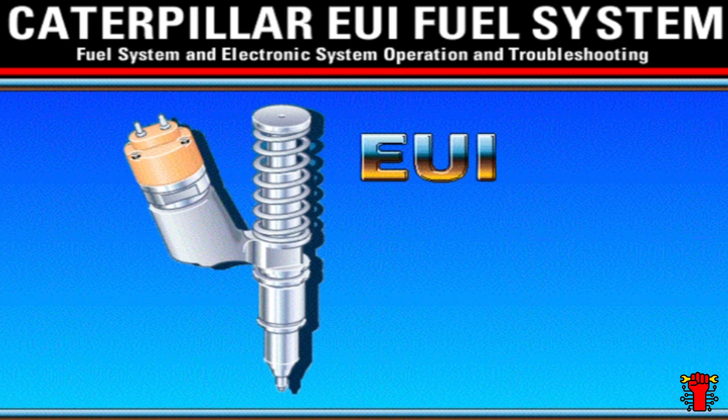Welcome to the introduction of basic operation and troubleshooting for the Caterpillar EUI Fuel System. This presentation is a generalized introduction of the features, system operation, and troubleshooting basics for Caterpillar engines using the mechanically actuated, electronically controlled unit injector fuel system.

This presentation is not intended to replace the Caterpillar service manual or other service publications. For detailed troubleshooting information, always refer to the latest service publications.

The EUI fuel system has been used on most new 10 to 16 liter displacement models of Caterpillar electronic truck and industrial engines introduced since 1988. This fuel system provides very high injection pressures and full authority electronic control for optimal engine performance, fuel economy, and exhaust emissions. Applications include the 3176, 3196, C10, C12, and 3406E engine families.

This presentation covers 4 topics: the electronic engine families using EUI, the operation of the EUI fuel system, the operation of the electronic control system, and finally, basic fuel system troubleshooting.

Since its introduction in 1988, the EUI fuel system has undergone many design changes to add features and improve performance and reliability. However, the operation and troubleshooting of all EUI systems is very similar. This presentation uses a generalized example of a system with the latest features.

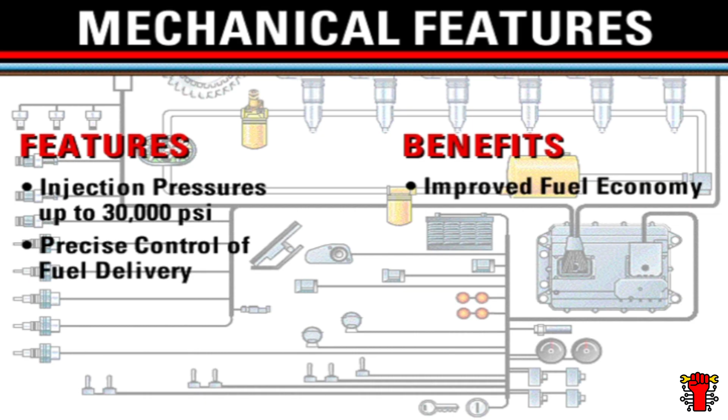The mechanical system consists of the low-pressure fuel supply system and EUI injectors. These components produce very high injection pressures of up to 30,000 psi and provide precise control of fuel delivery. This results in improved fuel economy and reduced exhaust emissions.

The electronic control system provides full authority electronic control of all engine functions. New features include electronic speed governing, cold startup mode strategy, automatic altitude compensation, variable injection timing, and oil pressure and coolant warnings and derate. These features result in precise engine speed control, unmatched cold starting, low smoke and emissions under all operating conditions, and built-in engine protection.

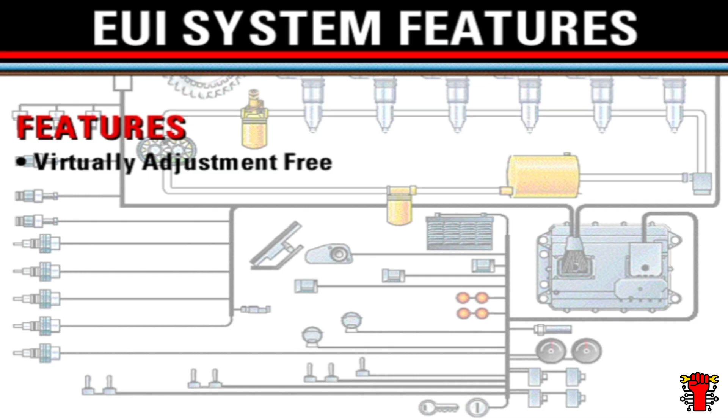The EUI fuel system and electronics are virtually adjustment-free. Most changes to engine horsepower or performance characteristics are accomplished by installing new electronic software or upgraded mechanical components. To repair the system, first identify and then replace the faulty component.

All system components, including the injectors, electronic sensors, harnesses, connectors, and electronic control module, are dealer serviceable. This allows faster repair times and eliminates the need to rely on the fuel system repair shop to make component repairs and adjustments.

The operation of the EUI fuel system is quite different from that of previous fuel systems. In order to troubleshoot an EUI system effectively, you must have a basic understanding of how it works. To help you learn the basics of the EUI system, we'll introduce each system component and then show how these components work together.

The EUI fuel system consists of 5 major components. Electronic unit injectors produce fuel injection pressures up to 30,000 psi and fire up to 19 times per second at rated speed. The fuel transfer pump supplies the injectors by drawing fuel from the tank and pressurizing it between 60 and 125 psi. The ECM is a powerful computer which controls all major engine functions.

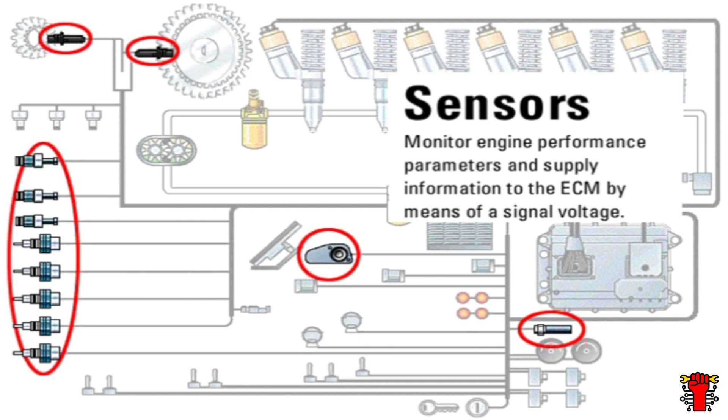Sensors are electronic devices which monitor engine performance parameters such as pressure, temperature, or speed, and supply this information to the ECM by means of a signal voltage. Actuators are electronic devices which use electrical currents from the ECM to change engine performance. An example of an actuator is the injector solenoid.

Now that we've introduced the major system components, let's discuss the operation of each component in more detail. We'll start with the mechanical components and then cover the electronic components.

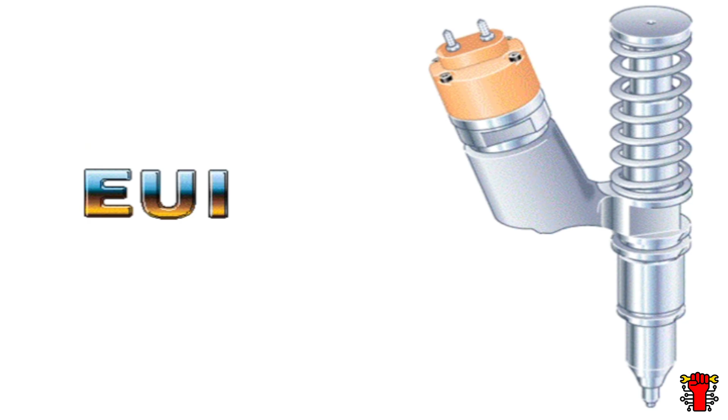Diesel fuel systems use a plunger and barrel to pump high-pressure fuel into the combustion chamber. The cam lobes, push rods, and rocker arms mechanically actuate the injectors. The term EUI is actually an abbreviation for mechanically actuated, electronically controlled unit injector. Major parts of the injector include the tappet, plunger, barrel and body, nozzle assembly, and cartridge valve. The nozzle assembly consists of a nozzle spring, nozzle check, and nozzle tip. The cartridge valve consists of a solenoid, armature, poppet valve, and poppet spring.

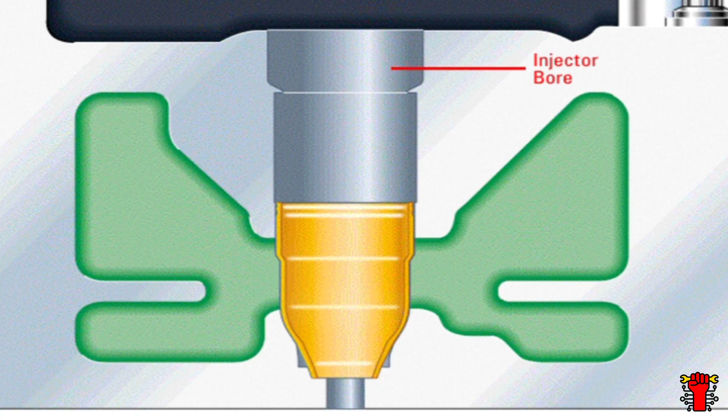The injector is mounted in an injector bore in the cylinder head, which has an integral fuel supply passage. On older engines, the injector seated on a brass sleeve, which was swaged into the bottom of the injector bore. The brass sleeve provided a combustion seal and separated the injector from engine coolant in the water jacket. On 3406E engines, an improved stainless steel sleeve is used.

This sleeve also separates the injector from engine coolant, but the injector actually does not touch the sleeve. Supply fuel is sealed above the sleeve by an external injector O-ring, and the cavity between the injector and sleeve is empty. The injector nozzle case seats directly on the cylinder head to provide a more positive combustion gas seal. The sleeve is installed with a light press fit and O-rings rather than the mechanical swaging used on brass sleeves. Increased wall thickness on the stainless steel sleeve allows the use of internal threads. These threads make sleeve installation and removal much easier.

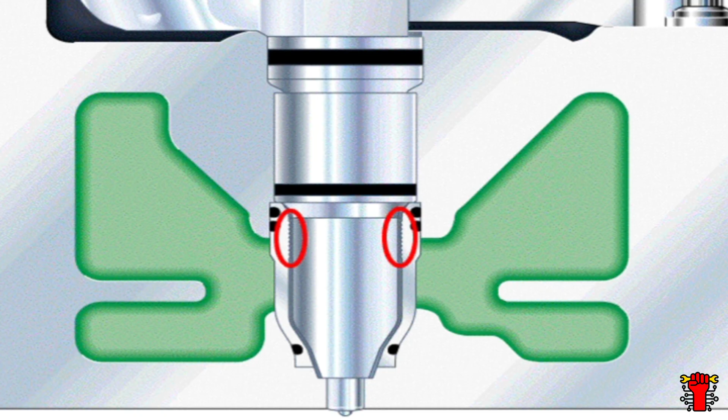C10, C12 engines also use a stainless steel sleeve similar to the 3406E. Rather than using O-rings, this sleeve fits in the cylinder head with a light press fit and is sealed using retaining compound on the upper and lower lands.

Actuation refers to the type of force used to power the plunger, which pumps the fuel out of the injector. Mechanically actuated fuel systems use a camshaft lobe and rocker arm to provide that force. The rocker arm presses down on the tappet at the top of the injector. The tappet, in turn, presses down on the injector plunger, which pushes fuel from the plunger cavity below the plunger.

Fuel displaced from the plunger cavity can flow in two directions. Fuel can flow to the nozzle assembly and to the nozzle tip. However, to flow out of the tip, the injection pressure must reach about 5,000 psi in order to raise the nozzle check against the force of the nozzle spring. The fuel chooses the path of least resistance. It flows around the normally open poppet in the cartridge valve assembly to the fuel supply passage in the cylinder head.

When injection is desired, the ECM sends a current to the solenoid on the cartridge valve. The current creates a magnetic field, causing the poppet to close. Fuel flow past the poppet is blocked, and pressure begins to build from the poppet through the plunger cavity to the nozzle check. When the pressure reaches approximately 5,000 psi, the force of the high-pressure fuel overcomes the spring tension holding the nozzle check closed. The check lifts off its seat and fuel flows out of the orifice holes in the nozzle tip.

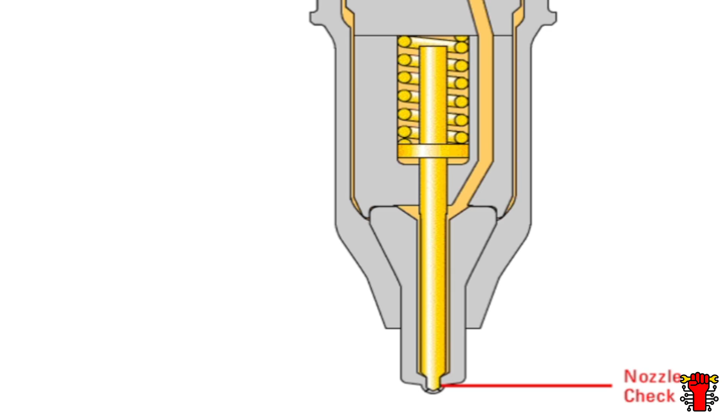This is the start of injection. The rapid flow of fuel out of the plunger cavity is restricted by the very small orifice holes. Because of this restriction, injection pressure continues to rise very rapidly, even after the nozzle check opens and injection begins. Injection pressures continue to rise until the flow rate out of the orifice holes equals that of the fuel leaving the plunger cavity. Depending on engine speed and fuel delivery, this pressure ranges from 10,000 to 30,000 psi.

High injection pressures promote complete combustion and lower exhaust emissions. Pushing the fuel through the orifice holes in the nozzle tip causes the fuel to atomize into droplets in the combustion chamber. Fuel droplets burn from the outside into the center. Large droplets take longer to burn and may not have time to burn completely during a normal combustion cycle. Increasing the pressure of the fuel through the orifice holes creates smaller droplets. In turn, smaller droplets burn more completely.

There are 4 stages in the operation of the EUI: pre-injection, injection, spill, and fill. The first stage, pre-injection, starts with the plunger and tappet at the top of their stroke. The plunger cavity is full of fuel, the poppet in the cartridge is open, and the nozzle check is closed.

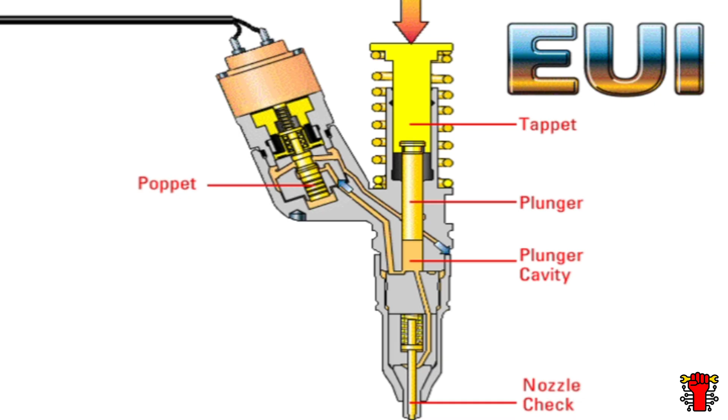Fuel leaves the plunger cavity when the rocker arm pushes down on the tappet and plunger. Fuel blocked by the closed nozzle check flows past the open poppet to the fuel supply passage in the cylinder head. As long as the solenoid on the cartridge valve is not energized, the poppet remains open, and fuel from the plunger cavity continues flowing into the fuel supply passage. To start injection, the ECM sends a current to the solenoid on the cartridge valve.

The solenoid creates a magnetic field which attracts the armature. When the solenoid is energized, the armature lifts the poppet until it contacts the poppet seat. Once the poppet closes, the flow path for the fuel leaving the plunger cavity is blocked.

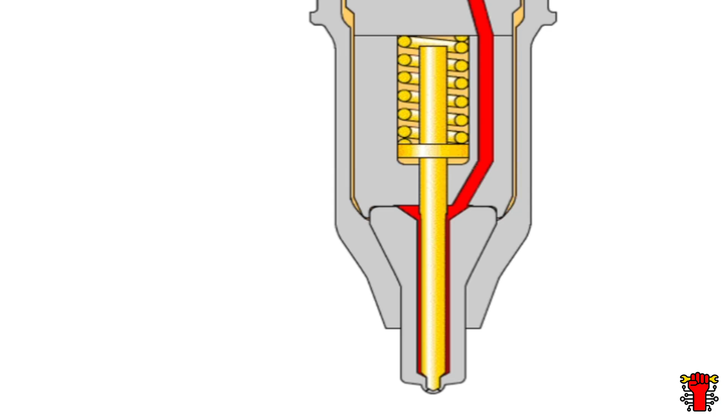As fuel continues out of the plunger cavity, pressure builds very rapidly. The poppet transfers this pressure through the plunger cavity to the nozzle assembly. When fuel pressure reaches approximately 5,000 psi, the nozzle check lifts off its seat and fuel flows out the tip. This is the start of injection.

Injection pressure continues to build very rapidly until the same volume of fuel pumping out of the plunger cavity sprays from the tip. Injection occurs as long as the plunger continues to move down and the energized solenoid holds the poppet closed.

When it decides that injection should end, the ECM stops current flow to the solenoid. This collapses the magnetic field holding the poppet closed. Spring and flow forces open the poppet almost instantly. High-pressure fuel can now flow around the open poppet and into the fuel supply passage.

With fuel injection pressures approaching 30,000 psi, the velocity of the fuel flowing around the poppet into the 100 psi fuel supply passage is very high. This results in a rapid drop in injection pressure. When injection pressure falls to about 3,500 psi, the nozzle check closes and injection stops. This is end of injection.

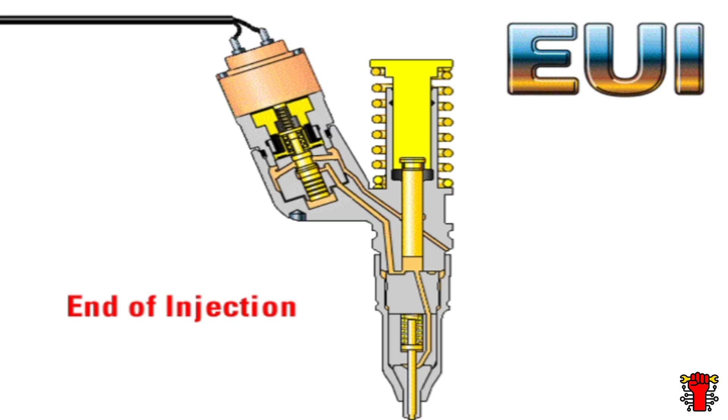The extremely fast pressure drop from peak injection to end of injection reduces particulate emissions and is an important benefit of EUI. Let's review the operation of the cartridge valve, which is the heart of the EUI injector.

In order to perform correctly, this valve must be able to open and close almost instantly, seal injection pressures of 30,000 psi, and prevent leakage of high-pressure fuel during injection. Containing these elevated injection pressures without leakage requires extraordinary manufacturing precision and tolerances. Any high-pressure fuel leaking past the poppet during injection is not delivered into the combustion chamber.

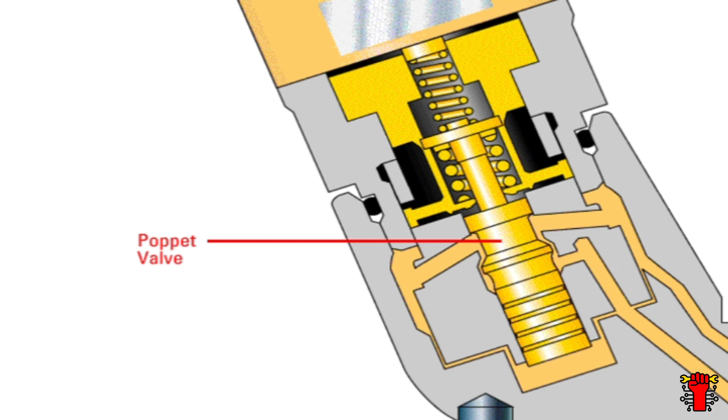The poppet valve opens and closes more than 500 million times during its normal wear life. The ability of the valve to function properly after hundreds of millions of cycles requires more than quality design and manufacturing.

This level of durability requires proper fuel filtration to remove microscopic abrasive particles contained in the fuel. Abrasive particles smaller than 10 microns in diameter can cause accelerated wear in any high-pressure fuel system. That is why much finer filtration is being used on modern engines with high-pressure fuel systems.

The condition of the sealing band on the worn poppet is the result of abrasive damage from inadequate filtration. The damage to the sealing band is due to abrasive particles in the fuel flowing at high velocity past the poppet seat. This worn poppet seat leaks significantly during injection, resulting in low fuel delivery into the cylinder. In short, a prematurely worn injector.

This condition can be avoided using proper filtration. Caterpillar offers high-efficiency fuel filters that meet the demands of newer high-pressure fuel systems and specifies the use of high-efficiency filters in many applications. Field experience demonstrates that these new filters more than double wear life of both new and old fuel systems over the former standard cat fuel filter.

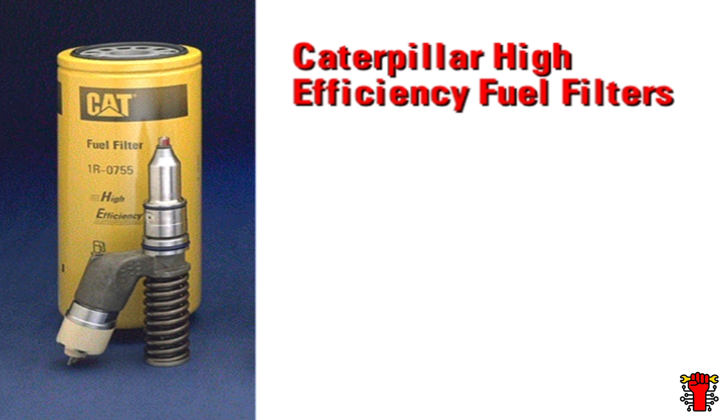There's a good deal of confusion regarding filter ratings. One of the more common terms, micron rating, can be misleading. There may be significant differences in the ability of different brand filters with the same micron rating to remove very small abrasives from the fuel.

Filter efficiency is commonly expressed in terms of nominal or absolute ratings. For example, a 5-micron nominal filter may only stop 50% of the 5-micron or larger particles striking it. In other words, every other 5-micron particle may pass through a filter with a nominal rating.

Caterpillar high-efficiency filters remove more than 98% of particles 2 microns or larger. However, the rating of the filter paper means nothing if the construction integrity of the filter is faulty. In some cases, competitive brand filters constructed with leak paths allow large amounts of all size particles to pass.

Caterpillar constructs its high-efficiency filters on a completely automated process, constantly testing to assure complete assembly integrity. Why is this fine filtration important? A recent study by a noted independent research agency confirmed that abrasive particles 5 to 7 microns in size cause most abrasive wear in fuel systems.

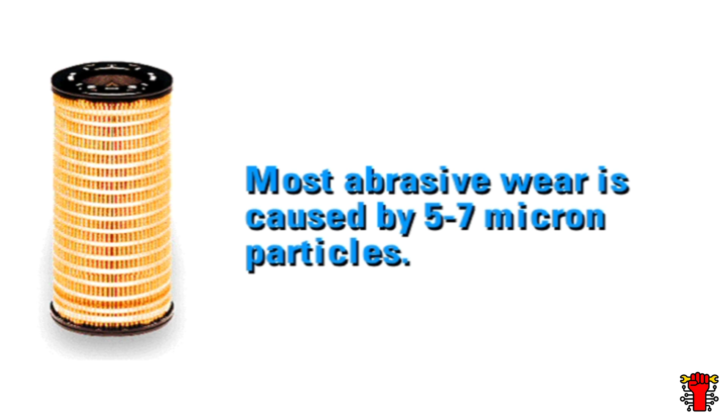Over time, these additional abrasives cause accelerated wear in any fuel system. This includes pump and line systems that operate at significantly lower pressures than EUI. Accelerated wear is more pronounced when the fuel contains unusually large amounts of contaminants.

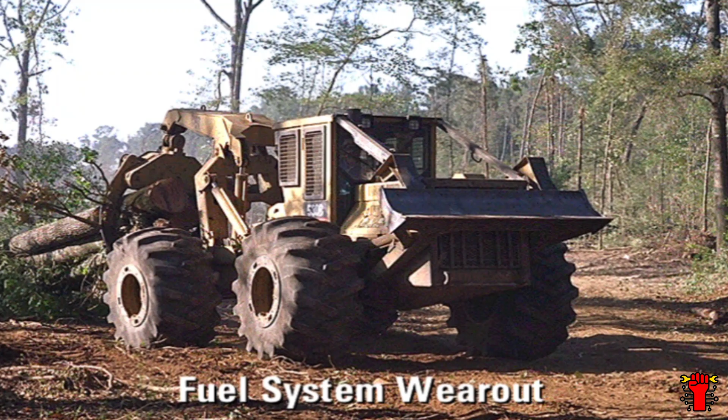A good example of this problem occurred several years ago in a logging application. The customer operated log skidders with pump and lines fuel systems and complained that the fuel injection pumps were wearing out in as little as 2,000 hours. Subsequent investigation revealed no manufacturing defects, so abrasives in the fuel were suspected. The customer was using the standard Caterpillar 15-micron filter, so many of the abrasives were smaller than 15 microns.

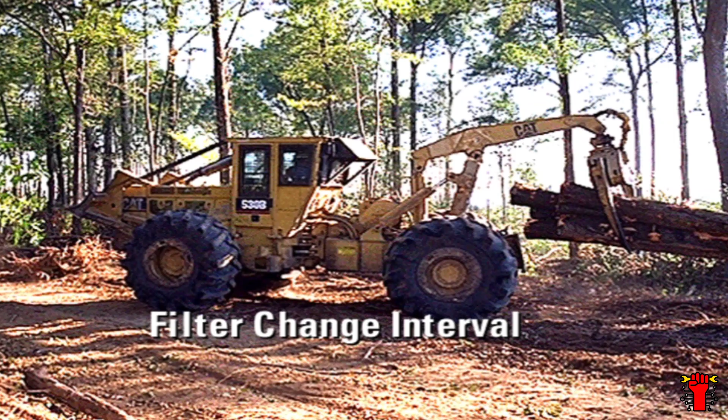Testing the theory, which states very small abrasives are at fault, a side-by-side test was run with completely rebuilt pumps on two identical machines. One machine remained equipped with the standard 15-micron filter, while the other machine was equipped with a high-efficiency 2-micron filter. Instead of changing filters at the recommended 250-hour change interval, both machines ran to 1,000 hours to see if the finer filter would plug from extended use. It didn't.

After 2,000 hours of use, both pumps were disassembled and inspected. The pump using the 15-micron filter suffered significant abrasive wear, while the one using the high-efficiency filter looked and performed like new. These findings led to the testing of the high-efficiency filter in other severe applications around the world.

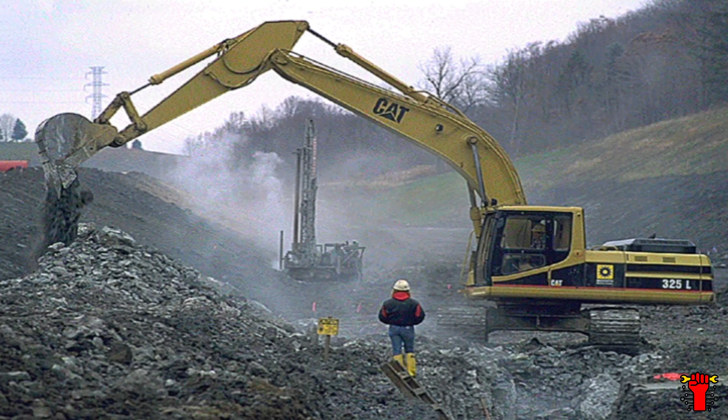In some countries, fuel lubricity is poor, and the fuel is loaded with very small abrasive particles. In these severe applications, the average life of many unit injectors in excavators has been about 1,500 hours. In extreme cases, injectors have worn out in as little as 200 hours. Since the introduction of high-efficiency filters in these applications, there's not been a single case of a documented system wear-out. Follow-up investigation shows some former problem machines now have over 5,000 hours of operation with no sign of injector wear.

There are many other examples of dramatic improvements in fuel system life using high-efficiency filters. The improvements have been so significant that this filter is now the standard fuel filter for all Caterpillar products.

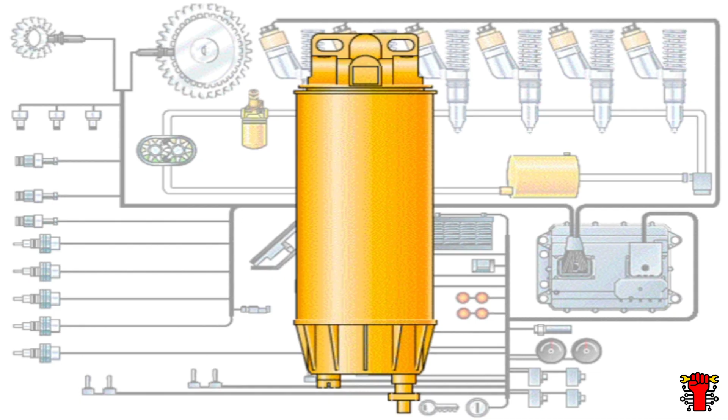Industrial or marine applications where large amounts of water may be in the fuel may have water separators in place of the primary fuel filter. The use and regular maintenance of a water separator is highly recommended where water contamination of fuel is a common problem. Water contamination is not usually as big a problem in on-highway truck applications that use fuel from reputable truck stops with very high fuel turnover rates. It is more of a problem for applications fueling out of stationary tanks with lower turnover rates.

Fuel stored for prolonged periods has a much greater probability of generating condensation. The number one cause of injector failure due to plunger seizure is ingestion of large quantities of water in the fuel. All diesel fuel contains some dissolved water, normally about 0.1% by volume.

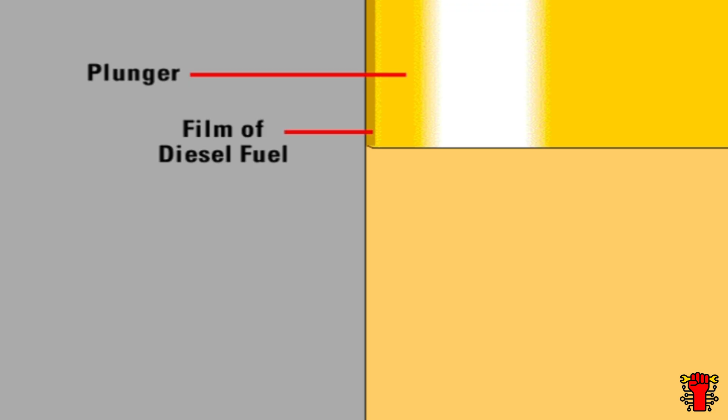We're not talking about this quantity of water. We're talking about large concentrations, in pints, quarts, or gallons, generated from condensation or tank leakage. The film strength of the diesel fuel separates the metal surfaces of the injector plunger and barrel. When the film is penetrated, metal-to-metal contact occurs between the plunger and barrel, resulting in plunger seizure and injector failure. Water has a much lower film strength than diesel fuel. Large quantities of water provide very poor plunger lubrication and film strength and lead to injector failure.

Some styles of aftermarket combination fuel filters and water separators recommend removing or bypassing the factory-installed secondary fuel filter. Removing or bypassing the 2-micron secondary filter is not recommended by Caterpillar. The use of aftermarket filters, the use of competitive brand filters, or even bypassing the factory secondary filter does not void the engine warranty. However, the warranty on fuel system components does not cover abrasive wear from improper filtration, unless a defect in material or workmanship is found in the fuel system component.

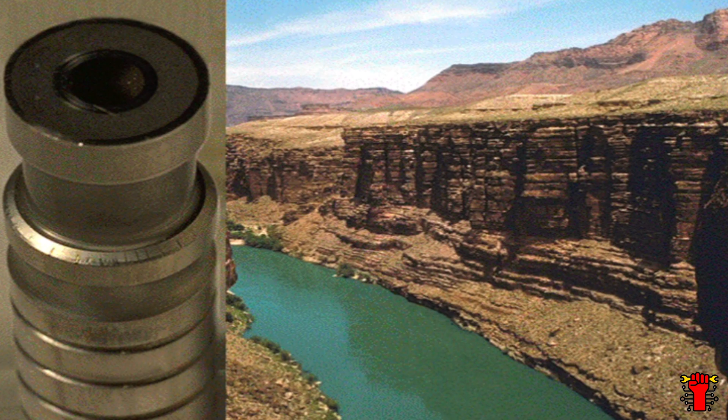Over time, abrasives in fluids can cause significant wear to even the most durable objects. Proper filtration is an essential factor in the life of all fuel system components.

The fuel transfer pump is a gear pump that pulls fuel from the tank and pressurizes it to supply the injectors. The pump has an internal relief valve that controls maximum system pressure between 60 and 125 psi, depending on engine model. The hand priming pump, located on the filter base, contains a check valve that allows pumping fuel around the pump gears. The transfer pump is not serviceable—replace it as a unit if it can't produce adequate pressure.

Always check the service manual for the correct pump pressure specification. Most fuel transfer pumps are located on the lower left side of the front cover. They may be mounted on either the front or the back of the front cover, depending on engine arrangement and packaging considerations.

The fuel filter base provides a mounting stud for the spin-on fuel filter and also contains the hand priming pump and a valve to bleed air from the system after filter changes. The priming pump and bleed valve provide a means to fill new filters with fuel and purge air from the low-pressure fuel system.

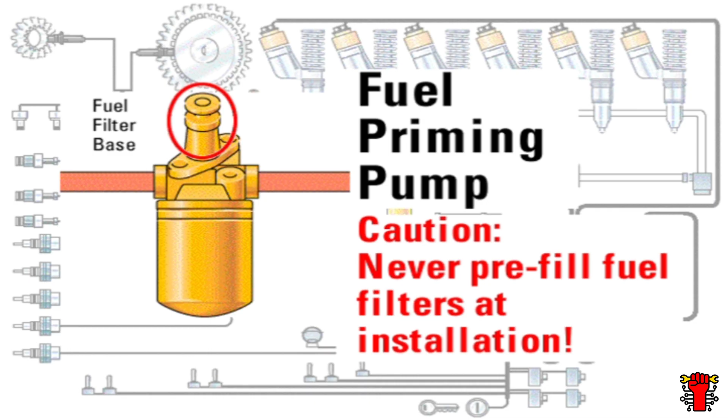Caution: never pre-fill the fuel filters at installation. Pre-filling bypasses the filter element and introduces dirt into the system. This practice alone contributes to premature system wear.

The final component in the low-pressure fuel system is the pressure regulator valve. This valve is located on the outlet end of the cylinder head fuel supply passage and is a normally closed pressure relief valve. There are two styles of valves used, 3406E and C10-C12. The 3406E regulator has a simple spring-loaded pressure relief valve that only opens when fuel pressure reaches the relief pressure setting. The C10-C12 style valve has a spring-loaded poppet with two orifice holes in the end.

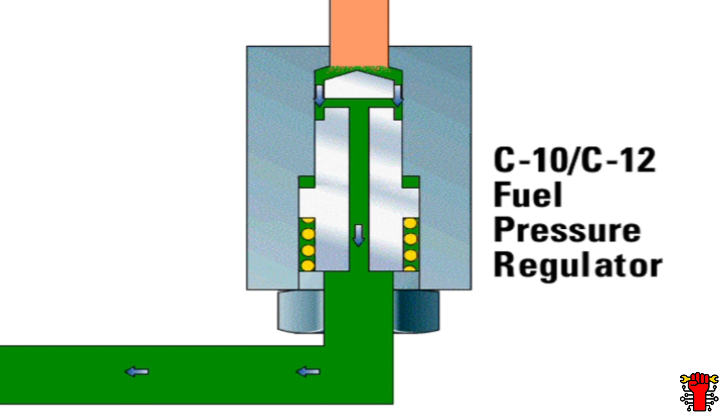This valve allows fuel to return to tank at a rate of 4 liters per minute, assuring adequate bypass flow and injector cooling. The pressure regulator valve also acts as a spring-loaded one-way check valve. The valve opens at 60 psi to allow excess supply fuel to return to the tank. When the engine is off and supply pressure drops to 0, the valve closes, preventing fuel in the head from draining back to the tank. While these valves differ slightly in design and operation, they serve the same purpose.

EUI injectors take low-pressure supply fuel and pressurize the fuel between 10,000 and 30,000 psi. A camshaft-operated rocker arm pushes down the injector tappet and plunger, supplying the mechanical energy required to pressurize and pump the fuel from the injector.

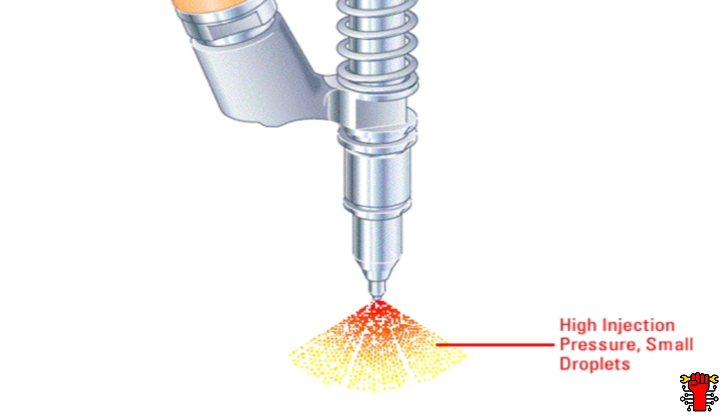The combustion chamber receives pressurized fuel in the correct quantity and at the correct injection timing. The extremely high-pressure fuel flow through small orifice holes in the tip causes the fuel to atomize into microscopic droplets that burn more completely. This improved combustion more efficiently uses the heat energy of the fuel, resulting in improved fuel economy and reduced exhaust emissions.

The low-pressure fuel system supplies fuel from the tank to the injectors. This system has three basic functions: to supply fuel to the EUI injectors for combustion, to supply extra fuel flow for cooling of the injectors, and to supply extra fuel flow to remove air from the system.

The major components in the typical low-pressure fuel system are the vehicle fuel tank, the fuel transfer lines, the primary fuel filter or water separator, the fuel transfer pump, the secondary fuel filter and priming pump, and the pressure regulator valve.

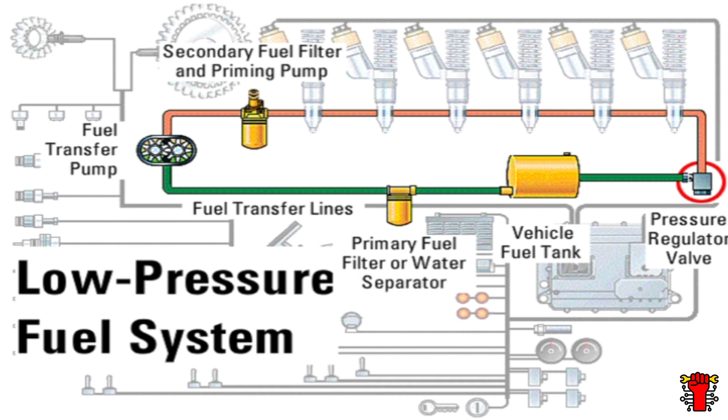There are often component differences between the fuel tank and transfer pump on different engine arrangements and applications. For example, the recommended arrangement for most truck engines utilizes a 15 to 30 micron primary filter to catch large debris from the fuel tank. However, some truck manufacturers do not install a primary filter and instead rely solely on the secondary filter.

Fuel drawn from the tank flows to the primary fuel filter or water separator. The primary filter screens large debris before the fuel flows to the inlet side of the fuel transfer pump. This is a simple gear pump containing an integral pressure relief valve. Fuel pressure is typically limited to between 60 and 125 psi. Excess fuel flows from the pressure relief valve on the outlet side of the pump through an internal passage to the inlet side of the pump.

Fuel flows from the outlet port of the transfer pump to the secondary fuel filter. In the past, secondary filters typically had 10 to 15 micron ratings. Most 1999 and newer engines use 2 micron fuel filters. The 2 micron filter removes the very small abrasive fuel contaminants which cause premature wear out of the injectors.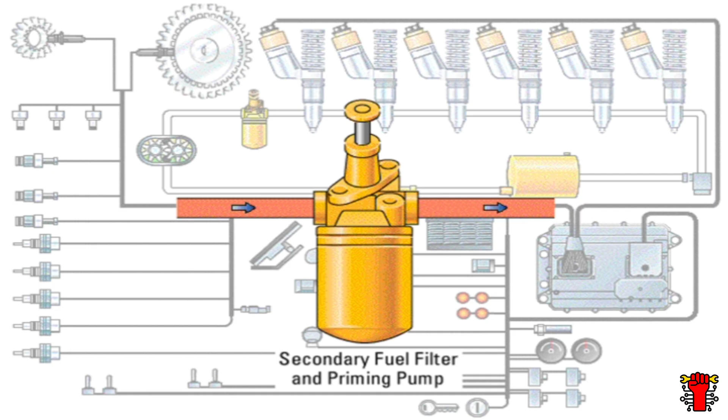The fuel filter base also contains a hand-operated fuel priming pump. The purpose of the priming pump is to refill the system with fuel and remove air from the low-pressure fuel supply system after a filter change or injector replacement. The priming pump pulls fuel from the tank, around the transfer pump, and into the filter.

It then pushes fuel through the supply passage in the cylinder head and back to the tank. Fuel flows from the secondary fuel filter to the supply passage in the cylinder head. On the 3406E, the fuel supply passage is a drilled hole extending from the front to the back of the cylinder head. On the C10, C12, a manifold on the side of the engine supplies fuel to each injector and returns excess flow back to tank.

Excess fuel flows into the fuel pressure regulator. The fuel pressure regulator consists of a spring-loaded check valve. This pressure relief valve opens at approximately 60 psi and regulates pressure in a range of 60 to 125 psi. When the engine is off and no fuel pressure is present, the spring-loaded check closes to prevent the fuel in the cylinder head from draining back to the tank. Retaining fuel in the head maintains a supply of fuel for the injectors at engine startup.

Most 1999 and newer EUI engines use a new electronic control system. This state-of-the-art system has many features and benefits. Although this presentation focuses on major electronic engine component operation, some basic electronic diagnostics are covered in the diagnostics portion of this presentation.

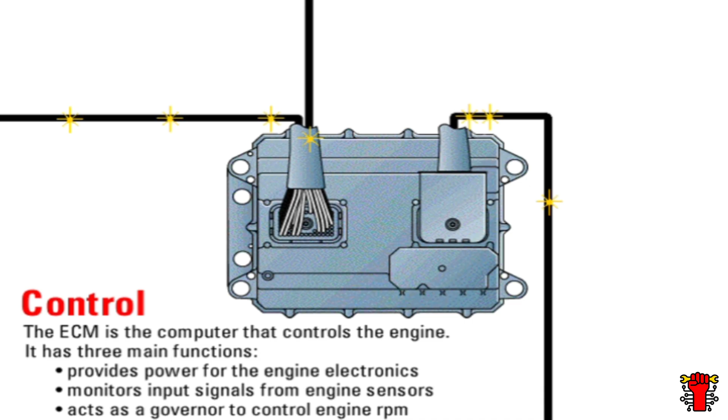The ECM is the computer that controls the engine. It has three main functions. It provides power for the engine electronics. It monitors input signals from engine sensors, and it acts as a governor to control engine RPM. It also stores engine operating information such as faults, events, and cumulative operating hours. The personality module is the software in the ECM, which contains the specific maps that define power, torque, and RPM of the engine. The ECM sends electrical currents to output devices to control engine operation.

The heart of the electronic system is the new electronic control module. This powerful, state-of-the-art computer controls all engine functions, providing excellent performance and fuel economy while meeting stringent and ever-changing exhaust emission standards. The ECM provides many electronic features, including full authority electronic engine control, logging of engine faults, improved electronic engine diagnostics, electronic cruise control, programmable electronic PTO, engine monitoring and protection, and more than 100 programmable features.

The new ECM has two 70-pin harness connectors, the engine harness connector and the vehicle harness connector. Older engines used an ECM with two 40-pin connectors.

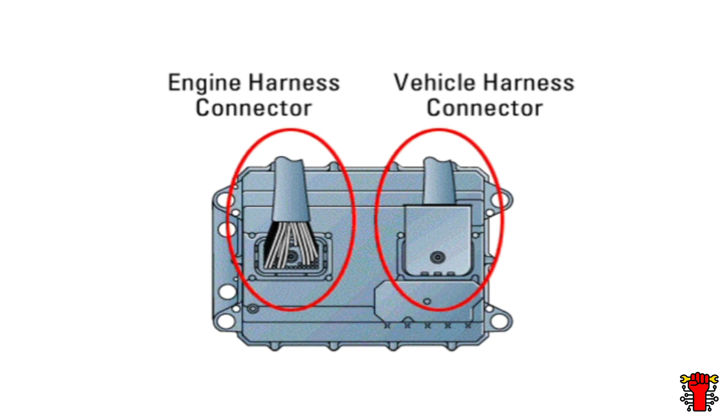The engine harness connects the ECM to all of the sensors and actuators, including the EUI injectors. The vehicle harness connects the ECM to the engine control portion of the main vehicle harness. This includes the accelerator pedal position sensor, vehicle speed sensor, transmission, brake and clutch switches, cruise control and PTO control switches, data links, check engine and warning lights, engine retarder switches, speedometer and tachometer, and cooling fan solenoid.

This wiring may seem complicated, but it's really quite simple. All of it is made up of many simple circuits. We will cover some of these circuits in the electronic system operation portion of this presentation.

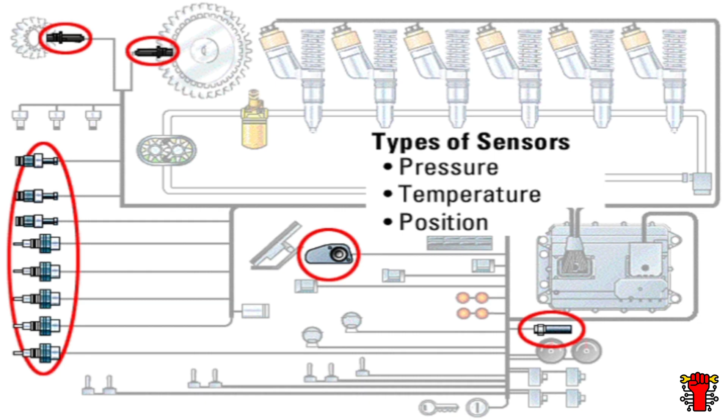Sensors are simple electronic devices that detect and convert a change in pressure, temperature, or mechanical movement into an electrical signal. There are four basic types of sensors: pressure, temperature, position, and speed.

A pressure sensor measures changes in pressure and sends a variable DC signal voltage back to the ECM. Pressure sensors have three wires. The first wire supplies voltage from the ECM to the sensor, providing power for sensor operation. This supply voltage is precisely controlled to 5 plus or minus 0.5 volts.

The second wire is a ground wire from the ECM to the sensor that provides a 0 volts reference. The third wire is a signal voltage from the sensor to the ECM. This signal voltage varies with changes in the pressure of whatever the sensor is monitoring. The operating range of the signal voltage is slightly greater than 0 volts and slightly less than 5 volts. A typical operating range for signal voltage is 0.5 to 4.5 volts.

The ECM also determines if a sensor is shorted or open by monitoring the signal voltage. If the signal voltage is the same as supply voltage, the ECM knows the sensor or sensor circuit is open. If the signal voltage is 0, the ECM knows the sensor or sensor circuit is shorted.

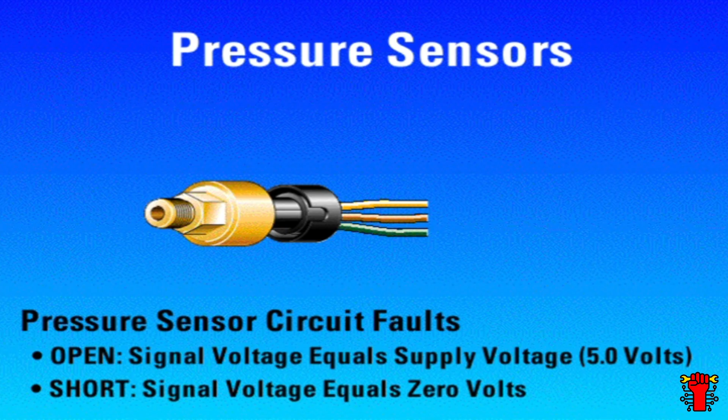If the ECM senses either a short or an open circuit, it will indicate a fault for that circuit to assist in troubleshooting. The key pressure sensors on the engine are the boost pressure, atmospheric pressure, and oil pressure sensors.

A temperature sensor measures temperature and uses only 2 wires. Temperature sensors change resistance as temperature changes. The ECM reads the resistance value and converts it to a temperature. The ECM determines if the temperature sensor is open or shorted by monitoring the resistance value. If there is a short, the resistance value is near zero. If the sensor circuit is open, the resistance value is very high.

The important temperature sensors on the engine are the coolant temperature sensor, the intake air temperature sensor, and the fuel temperature sensor. The third type of sensor is a position sensor.

An example of a position sensor is the accelerator pedal position sensor. This sensor monitors the position of the accelerator pedal and converts that position into a pulse width modulated signal that is sent back to the ECM.

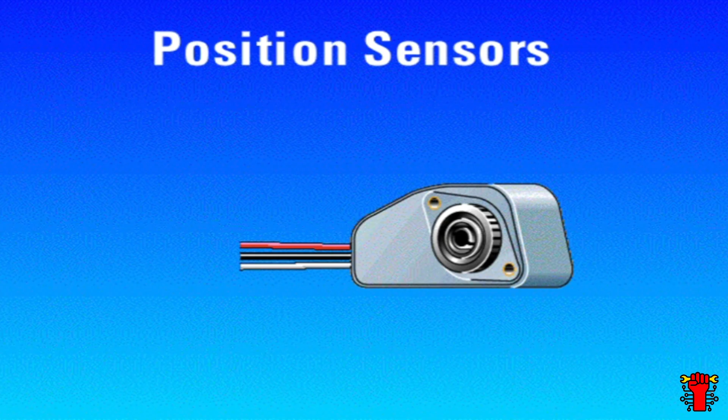A position sensor has 3 wires. The first wire supplies voltage from the ECM to provide power for sensor operation. The supply voltage for the accelerator pedal position sensor is 8 plus or minus 0.5 volts. The second wire is a ground wire from the ECM to the sensor that provides a 0 volts reference to the sensor. The third wire is a signal voltage from the position sensor to the ECM.

The accelerator pedal position sensor generates a pulse width modulated signal, which is a square wave. A square wave is either full voltage or 0 voltage, on or off. Duty cycle is the percent of on time. The duty cycle for the low idle accelerator pedal position is between 10 and 22%. Duty cycle at the high idle accelerator pedal position is 75 to 90%.

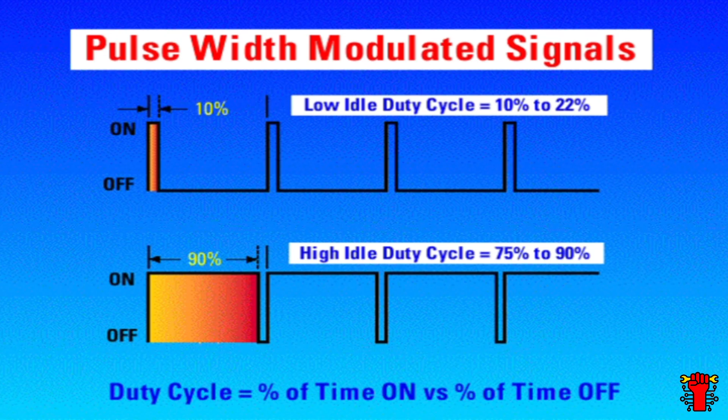The accelerator pedal position sensor transmits this duty cycle signal to the ECM at a constant frequency. This type of sensor provides a very accurate signal to the ECM with a smooth transition during acceleration and deceleration. The ECM determines if the accelerator pedal position sensor is faulty by monitoring the duty cycle. If the duty cycle is less than 5% or greater than 95%, the ECM will log an active fault.

The fourth type of sensor is a speed sensor. The speed timing sensor has a permanent magnet and a coil of wire. A change in the magnetic field of the sensor induces a voltage into the sensor. The ECM reads the increase and decrease in voltage as a signal.

As the camshaft gear rotates, signal teeth cast into the gear pass through the magnetic field of the speed timing sensor. The sensor generates a signal voltage as each timing tooth passes. The ECM counts the time between these signals to determine how fast the engine is running. All of the teeth are evenly spaced except one pair, which has an additional tooth between them. This additional tooth sends an additional signal, which indicates top dead center to the ECM.

Because speed sensors use an internal magnet and coil to generate a signal voltage, they do not require a supply voltage from the ECM. They also use only 2 wires instead of the 3 wires used on pressure and position sensors. Newer engines use dual speed sensors, each with 2 wires. One is for the camshaft gear and the other is for the crankshaft gear. Older engines use a single 3-wire speed sensor for the camshaft gear.

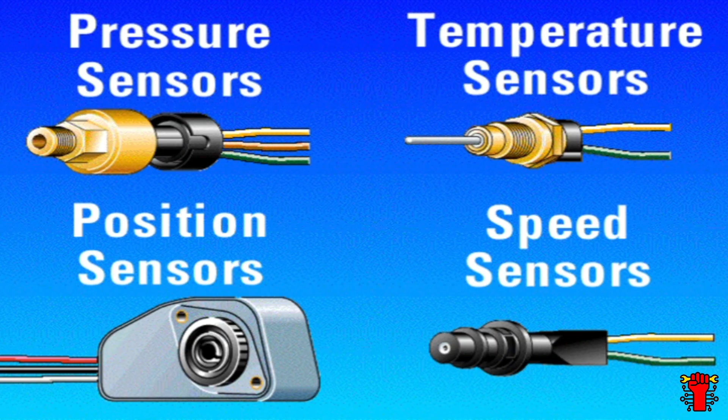Another electronic feature we will discuss is called electronic trim, or E-trim for short. This feature electronically adjusts the performance of individual injectors to reduce the fuel delivery variability of a set of injectors. E-trim is necessary because there's no way to mechanically adjust fuel delivery on an EUI injector. An assembled injector must fall within a specified delivery tolerance when it is assembled and tested. However, in a set of 6 injectors, the combined delivery variability may cause undesirable idle quality or rated performance.

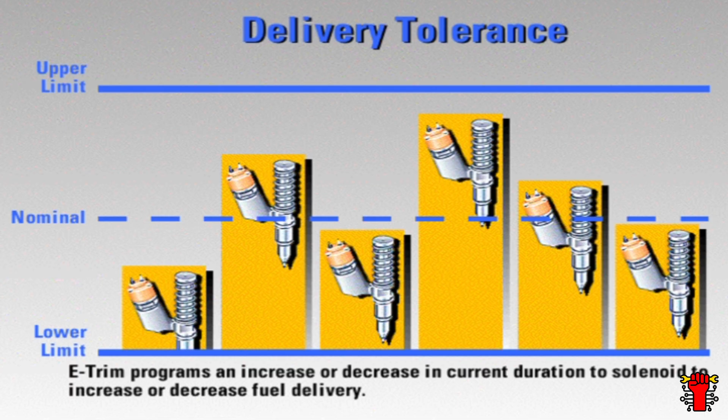E-trim reduces injector set variability by using a programmed increase or decrease in the current duration to the solenoid when the injector is fired, to increase or decrease fuel delivery. The E-trim value of each injector is determined by injector performance at final test. If delivery is higher or lower than the exact desired value, an E-trim code is assigned to compensate for the variability. When the injectors are installed in a new engine, the E-trim value of each injector is programmed into the ECM.

This feature has greatly increased customer satisfaction and engine performance. When an injector is replaced in the field, a new E-trim value must be programmed into the ECM for that injector. On the 3406E, the code for the new injector is a 4-digit code engraved on the injector tappet. On the C10, C12, the trim code is located on the solenoid. This procedure is explained in the service manual and is discussed in the Diagnostics section of this presentation. E-trim is used on most newer engines, including the C10, C12, and 3406E.

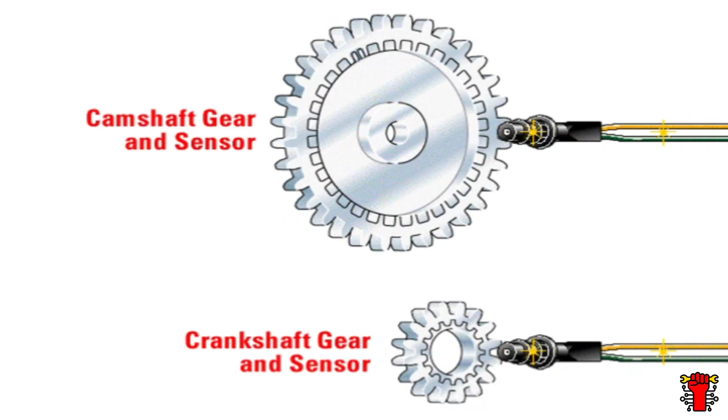The speed timing circuit is the most important of all the basic circuits. This speed timing signal tells the ECM the position and speed of the engine camshaft and crankshaft. The ECM requires these signals to govern engine operation. The speed timing signal is so important that it has two sensors, a camshaft sensor and a crankshaft sensor. Each sensor has a different advantage. The camshaft sensor provides a clear signal identifying engine top dead center. However, due to dynamics of the front gear train, there is a slight amount of timing variability when using the camshaft signal only. The crankshaft sensor provides a more accurate timing signal because it reads directly off the crankshaft, yet it cannot determine if the engine is on the power stroke or exhaust stroke.

The engine will continue to operate if either sensor fails. If the ECM detects a loss of RPM signal from one sensor, it will automatically switch to the other sensor and indicate both an active and a logged fault. The ECM will delay lighting the check engine light after detecting a sensor failure because the engine will continue to operate without loss of performance. However, the ECM does immediately indicate the fault, so the service technician can find and repair the problem.

In case of a camshaft sensor failure, the engine may crank longer before starting. Since the crankshaft sensor cannot determine the power or exhaust stroke, a strategy in the ECM alternates injection timing every 2 seconds of cranking until the engine starts.

The accelerator pedal position sensor circuit determines desired engine speed by sensing the position of the accelerator pedal and sends a pulse width modulated signal back to the ECM. The ECM then compares desired engine speed to actual engine speed, determining how to fire the injectors. The operator selects an engine speed with the accelerator pedal. The position of the accelerator pedal generates a pulse width modulated signal, which the ECM translates into the desired engine speed.

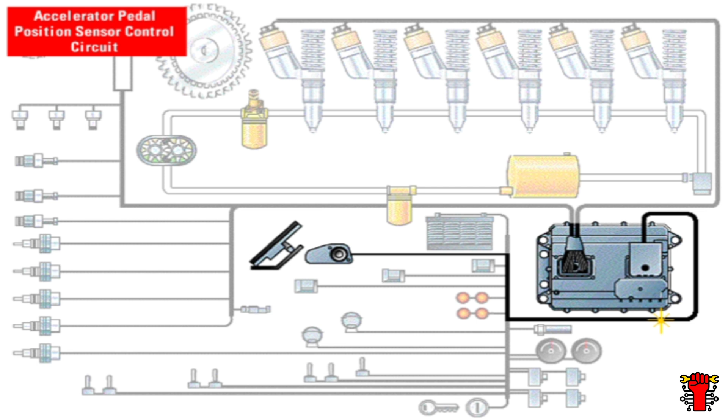The ECM then compares the desired engine speed to the actual speed, determining if the injectors should deliver more or less fuel. The ECM increases the duration of the current to the injectors, delivering more fuel and increasing engine speed if the actual engine speed is lower than desired. If the actual engine speed is higher than desired, the ECM decreases duration to reduce fuel delivery. With less fuel, engine speed drops very rapidly until actual engine speed matches desired speed.

The ECM uses many other sensor inputs besides the accelerator pedal position signal to determine the correct operation of the EUI injectors. The ECM must determine three things to control injector operation: injection timing, or when injection starts; the quantity of fuel injected; and engine speed, in order to determine current duration and length of injection. All sensor inputs are compared to the software maps in the ECM, and output signals are sent to the injectors. These output signals control actual engine operation.

The boost pressure sensor measures boost pressure in the intake manifold and sends a DC signal back to the ECM. The ECM uses the boost pressure signal to limit fuel delivery and prevent overfueling and black smoke. This serves the same function as a mechanical fuel-air ratio control.

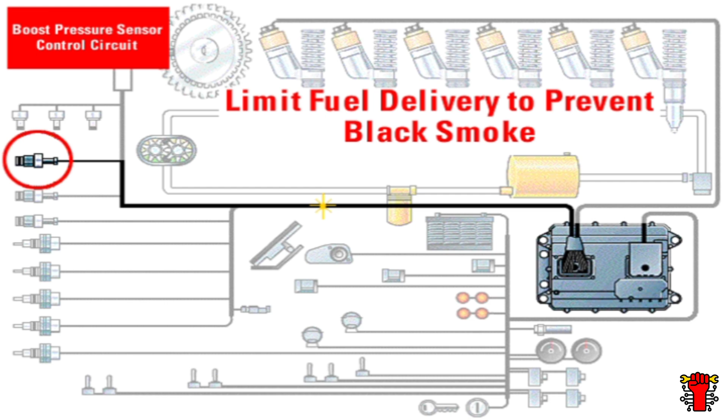The atmospheric pressure sensor measures atmospheric pressure in order to compensate for altitude. It sends a DC signal back to the ECM. The ECM uses the atmospheric pressure signal to adjust timing and fuel delivery, maintaining engine performance and emissions at high altitudes. The atmospheric pressure sensor is also used to automatically calibrate the other pressure sensors.

The engine oil pressure sensor measures the pressure of the engine lube oil and sends a DC signal voltage back to the ECM. The ECM uses the oil pressure signal to help determine if the engine is operating with low oil pressure.

Every engine is equipped with an engine monitoring system that can be programmed to off, warning, derate, or shut down. The ECM will turn on a warning lamp when a low oil pressure condition exists. If the ECM is programmed to derate, engine power will be reduced. If programmed to shut down, the engine will shut down. This shutdown option is not available on earth-moving vehicles. Diagnostic codes logged will be low oil pressure or very low oil pressure.

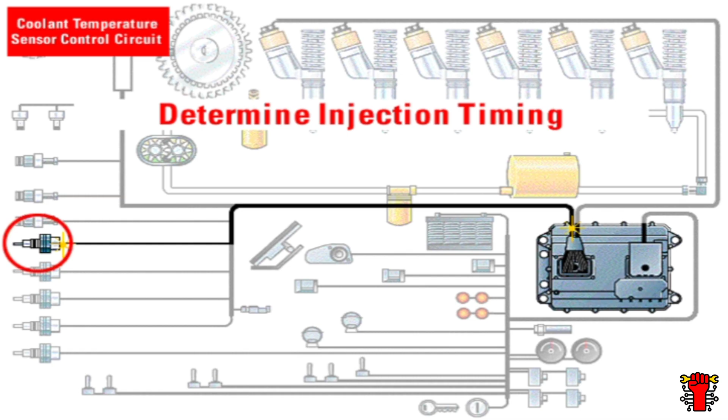Cold mode is an electronic strategy which retards injection timing to improve cold performance and reduce white smoke. Engine performance is slightly impaired during cold mode operation due to retarded injection timing. When the engine warms up to near normal operating temperature, the cold mode strategy is disengaged and normal performance strategy resumes. The ECM also uses the coolant temperature signal for high temperature protection.

Every engine is equipped with an engine monitoring system that can be programmed to off, warning, derate, or shut down. The ECM will turn on a warning lamp when a high temperature condition exists. If the ECM is programmed to derate, engine power will be reduced. If programmed to shut down, the engine will shut down. This shutdown option is not available on earth-moving vehicles. There are diagnostic codes for high engine temperature and very high engine temperature.

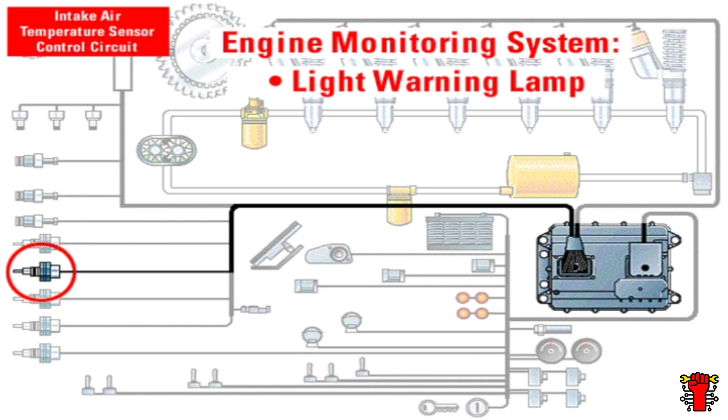The intake air temperature sensor measures the temperature of the air entering the intake manifold. It converts temperature to a resistance value that the ECM reads. The ECM uses the intake air temperature signal to help determine proper injection timing and engage or disengage the cold mode strategy. High intake air temperature will turn on a warning lamp if the electronic monitoring system is programmed to warning, derate, or shut down. However, high intake air temperature will not cause the ECM to derate or shut down the engine. Diagnostic codes are high intake air temperature and very high intake air temperature.

The fuel temperature sensor measures the temperature of the fuel in the supply passage of the cylinder head. It converts temperature into a resistance value that the ECM reads. The ECM uses the fuel temperature signal to help determine the proper quantity of fuel to inject. The volume of fuel expands as the fuel gets hotter. As engine temperatures increase, the combustion chamber requires a greater volume of fuel to produce the same level of power. Software maps in the ECM adjust injector duration and increase fuel delivery to compensate for increasing engine temperatures.

The ambient air temperature sensor is an OEM-installed option which measures outside air temperature on applications which use a programmed idle shutdown feature. The sensor converts temperature to a resistance value that the ECM reads. The ECM uses the ambient air temperature signal to help determine if a programmed idle shutdown can be overridden if ambient air temperatures are extremely hot or cold. The most common use is on trucks where an operator may need to leave the engine running to operate the air conditioner or heater during a rest period. This sensor is an optional feature.

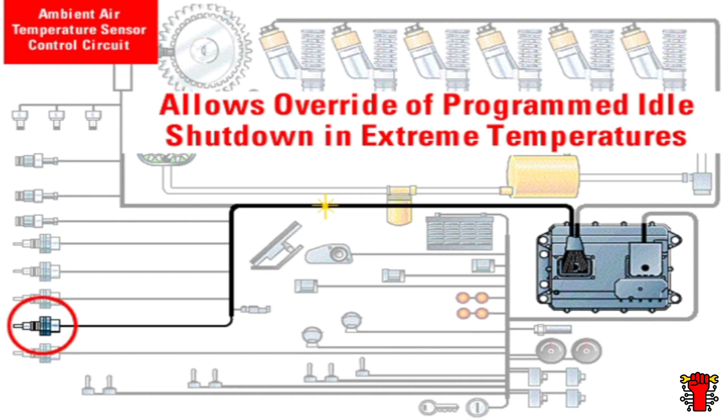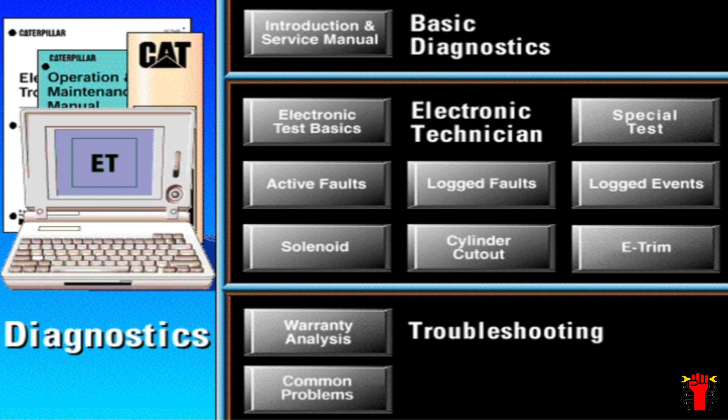Understanding the basics of how the fuel and electronic control systems operate is essential to identifying system problems. The objective of this section is to introduce the basic diagnostic procedures used to identify and correct problems on EUI-powered engines. The system used in this presentation is only an example of a typical modern EUI system. There are many different engine arrangements and applications. For example, older engines use an ECM with two 40-pin connectors rather than the newer 70-pin version. However, the basic troubleshooting logic and procedures are very similar for all EUI engines. Always refer to the correct service manual for the latest repair and diagnostic information.

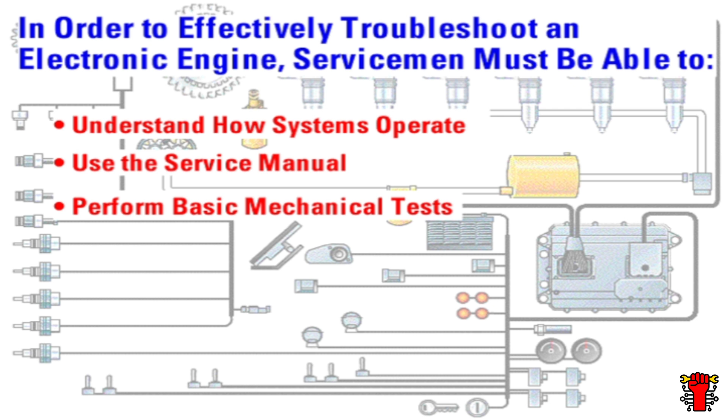Modern electronically controlled engines offer improved diagnostic capability over older mechanically controlled engines, but they are not totally self-diagnostic. In order to troubleshoot an electronic engine effectively, service technicians must have 5 skills. They must be able to understand how the fuel system and electronic control systems operate, find appropriate information in the Caterpillar service manual, perform basic mechanical tests, perform electronic system tests, and interpret test results to find the root cause of a problem. A good basic understanding of system operation is the most important part of effective troubleshooting.

For example, adjustments to horsepower or performance characteristics are made by installing new software or by upgrading mechanical components. No mechanical adjustments can be made to any part of the EUI fuel system. Technicians who do not understand how components and systems operate end up guessing at which component to replace. Replacing the wrong component increases customer downtime, repair cost, and customer dissatisfaction. In addition,

Never disassemble EUI fuel system components in the field. Disassembly generates thread debris and introduces dirt, causing serious injector damage. Unauthorized disassembly of warranty components will result in reduced or non-allowed warranty reimbursement.

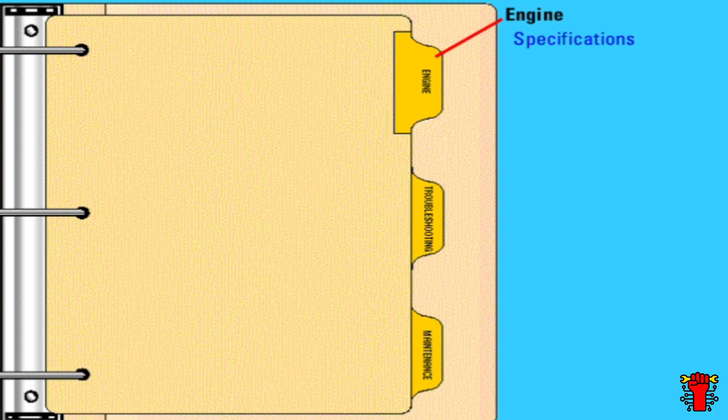A second important skill is the ability to use the Caterpillar service manual effectively. The service manual has 3 parts: engine, troubleshooting, and maintenance. Under the Engine tab, you will find 3 modules: Specifications, Systems Operation, Testing and Adjusting, and Disassembly and Assembly. In the Specifications module, you will find torque values, torque sequences, pressure settings, and numerical values for adjustments, such as

valve lash settings. In the Systems Operation, Testing and Adjusting module, you will find explanations of how mechanical systems operate, test procedures for mechanical components, and adjustment procedures for mechanical components, such as the valve lash settings. In the Disassembly and Assembly module, you will find removal and installation procedures for major components, such as EUI injectors, disassembly and assembly procedures for serviceable components, like water pumps, and disassembly and assembly procedures for the basic engine.

Under the Troubleshooting tab, you'll find an electrical schematic and a troubleshooting module. The schematic contains location and identification information for engine wiring, connectors, electrical components such as switches and relays, and electronic components such as sensors and the ECM.

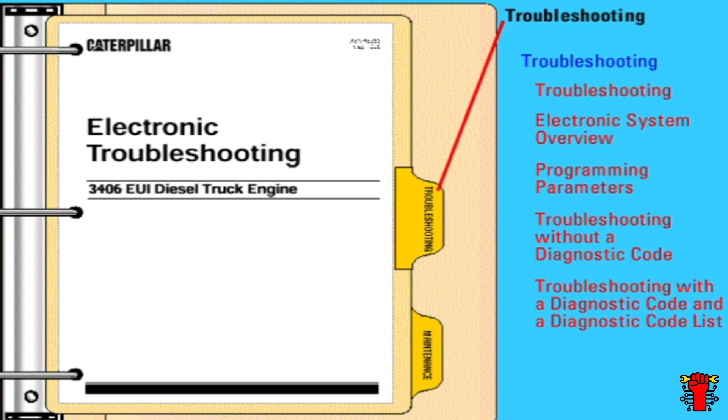The Troubleshooting module contains all of the information for troubleshooting electronic engines. Topics that are covered are troubleshooting, electronic system overview, programming parameters, troubleshooting without a diagnostic code, troubleshooting with a diagnostic code, and a diagnostic code list.

In the Operation and Maintenance Guide, you will find maintenance information that is primarily intended for the operator or owner. This guide contains specifications for cooling, lube, and fuel systems, recommended practices for engine operation, and maintenance recommendations, such as maintenance schedules and refill capacities.

The next important skill is to be able to perform basic mechanical tests correctly. This includes being able to measure hydraulic pressure, use a volt-ohm meter to perform basic electrical tests, checking boost pressure and exhaust restriction to determine if the engine performs properly.

It is also essential that you use and understand the features in Caterpillar Electronic Technician, or ET for short. ET is required to service electronic engines. With it, you can identify, understand, and correct active faults, logged faults, and logged events. You can also read and change programmable parameters and view status screens.

You can perform the injector solenoid test, the cylinder cutout test, and several other special tests that enable and disable specific ECM outputs. In order to better understand these tests, the cylinder cutout and solenoid test are performed and explained in the diagnostic section of this presentation.

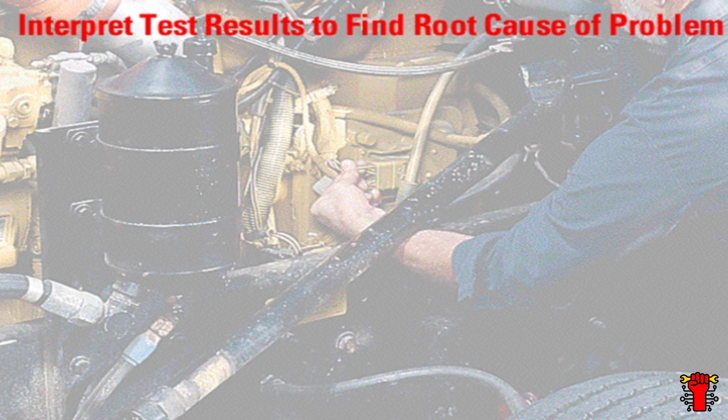Finally, interpreting test results to find the root cause of a problem is critical. This includes being able to evaluate component performance of the sensors, actuators, injectors, and associated wiring. It also includes being able to understand how components and systems interact, how components work correctly, and how the system reacts if a component is faulty.

These skills are important to be able to quickly identify and correct problems on electronically controlled engines. Only electronically controlled engines constantly meet demands for improved performance, reduced emissions, and improved fuel economy. There are many misconceptions about what electronically controlled engines can and cannot do. A quick review of these will illustrate why the troubleshooting skills just mentioned are so important.

Electronically controlled engines can indicate active faults, log faults, and events, identify major component failure, and identify sensor and actuator short and open circuits.

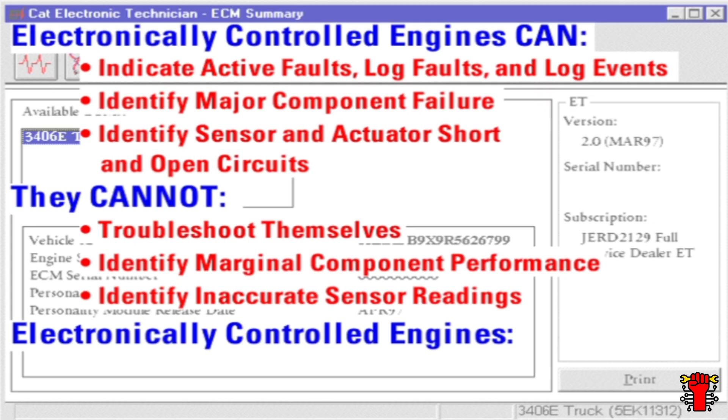Electronically controlled engines cannot troubleshoot themselves, identify marginal component performance, or identify inaccurate sensor readings. In short, electronically controlled engines cannot think for themselves. It is your ability to think and understand how engine components and systems work together that allows you to perform effective troubleshooting.

Performing the basic electronic tests on EUI engines is simple. The electronic diagnostic tool used to perform these tests is the Caterpillar Electronic Technician, or ET for short. ET is actually a software package run on a laptop computer.

ET can perform the injector solenoid test, cylinder cutout test, identify active faults, logged faults, and logged events. ET can display engine configuration, change customer programmable parameters, flash program new software into electronic engines, and print configuration and test results for further analysis.

Older engines were equipped with replaceable personality modules. Installing new software required ordering and installing a new personality module. This method increased both product cost and customer downtime. Newer ECM designs contain an integral personality module, which is not replaceable, but can be flash programmed.

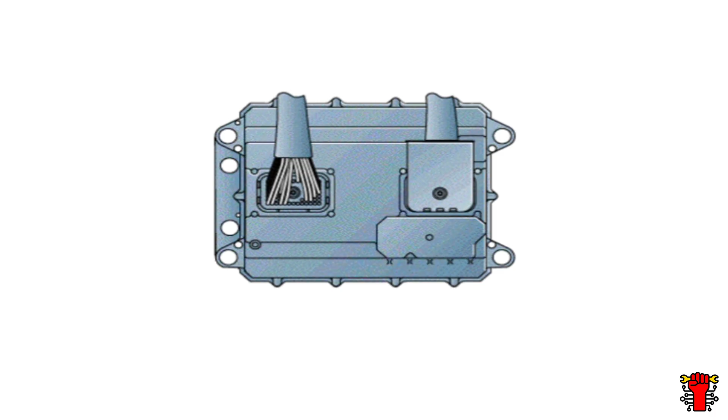ET is required to flash program both new and older engines. This example uses ET to demonstrate the basic electronic tests with the screens and cursor commands to perform each test. It does not cover the actual instructions on how to use ET. Specific instructions are available in the Caterpillar Service Tool Software User's Manual for CAT Electronic Technician, form number NEHS 0679.

The first diagnostic test identifies active fault codes, or active faults for short. Active faults indicate a system malfunction or problem currently present. An example is a shorted or open sensor, wire, or circuit. Let's look at an example.

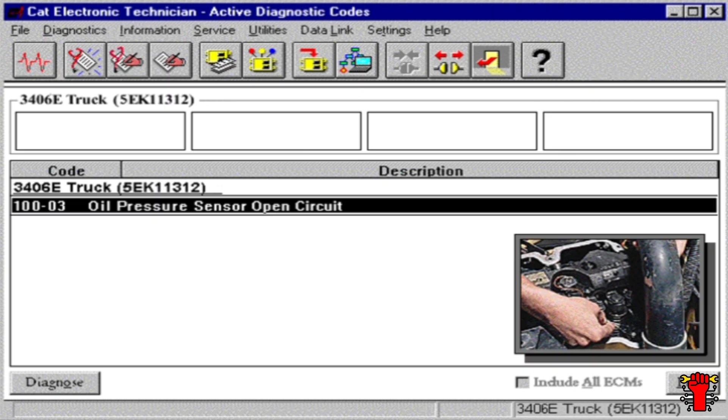When no active faults are present, the ET screen will read 'No active codes.' If we unplug the oil pressure harness connector, ET identifies this as an open circuit active fault after a few seconds. The code for this fault is 100-03, which ET defines as an oil pressure sensor open circuit. Detailed information for troubleshooting this code is in the troubleshooting guide.

The ECM can remember up to 256 occurrences of a logged fault. If the fault occurs more than this, the ECM will remember the last 256 occurrences. However, after 100 hours, most logged codes are deleted.

Generally, logged events are not electronic problems, but indicate an abnormal engine condition. Examples of logged events are a programmed idle shutdown, engine overheat, or engine overspeed. These are not electronic problems, but are abnormal operating conditions.

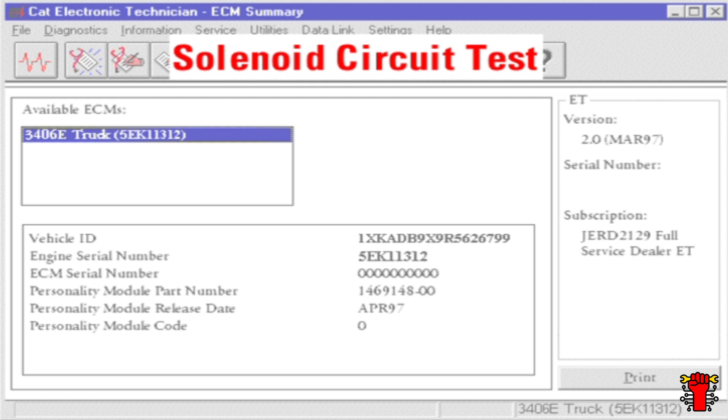The purpose of the injector solenoid test is to make sure there are no open or short circuits in the injector wiring harness, and all of the injector solenoids are working. Select the Start button at the bottom of the screen to begin.

ET instructs the ECM to actuate each injector solenoid in order from 1 through 6. This test will continue until clicking the stop button at the bottom of the screen. If a short or open circuit is detected, the fault will be listed on the screen and the defective circuit will not work.

The cylinder cutout test measures the contribution of individual cylinders, compares one to another, and determines if any are weak. The automated multiple cylinder cutout test, used in ET version 2.4 and later, has three options. First is the single cylinder cutout test.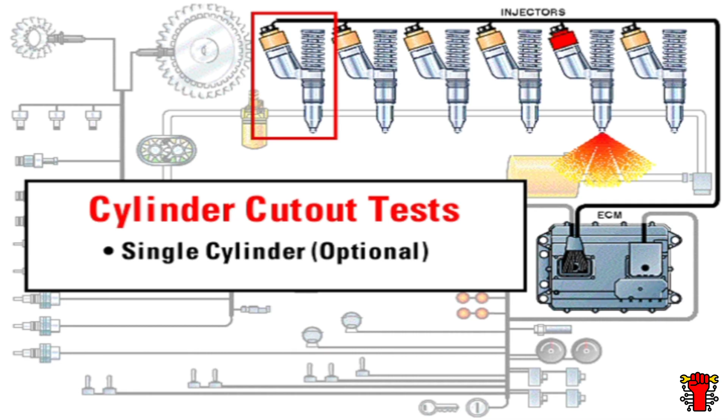This is an optional test because it is the least effective of the three. Only use the single cylinder test when engine performance is so poor that the engine will not continue to run with multiple injectors turned off. The second test is the four-cylinder cutout test, which is recommended for most applications. The purpose of this test is to increase the load on the two running injectors by turning off the other four cylinders.

This test shuts off half of the engine at a time and then tests one cylinder in the running half. For example, the test starts by turning off cylinders 4, 5, and 6. The test then turns off number 1 and samples the injector current duration to cylinders 2 and 3. After the test on cylinder 1 is complete, number 1 is turned back on and the engine stabilizes for 5 seconds before testing number 2.

After 5 seconds, the test turns off number 2 and samples the injector duration of the two running cylinders 1 and 3. After completing cylinder number 2, the process is repeated for cylinder number 3.

When the number 3 cylinder test is complete, ET turns on all 6 cylinders and allows the engine to idle normally for 5 seconds. Then it shuts off cylinders 1, 2, and 3, repeating the test sequence for cylinders 4, 5, and 6.

This is the recommended test procedure for most applications. In rare instances where the four-cylinder cutout test may not be sensitive enough to identify a single weak cylinder, the 5-cylinder cutout test may be used.

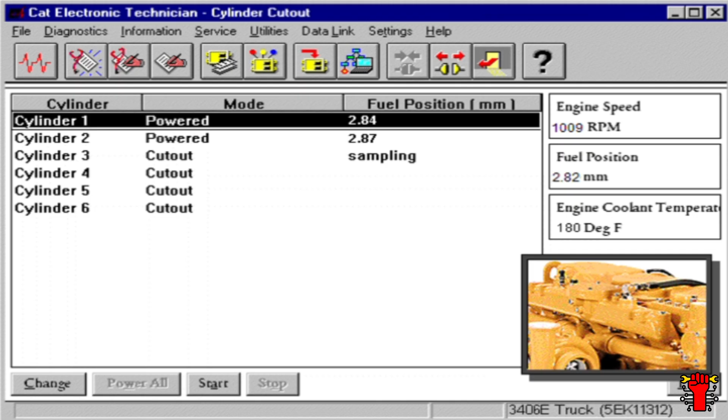In order to reduce test variability and make it more accurate, the test repeats 2 times and the results averaged. Once all 6 cylinders have been checked 2 times each, test values are assigned to each cylinder. The ET software completes the calculation and identifies which injectors are OK or not OK.

If a new injector is installed, the E-trim code for the new injector must be programmed into the ECM. This is easily done with ET.

In this case, it was cylinder number 3. The code shown for cylinder 3 was the E-trim code for the previous injector. On the 3406E, the code for the new injector is a 4-digit code engraved on the injector tappet. On the C10, C12, the trim code is located on the solenoid.

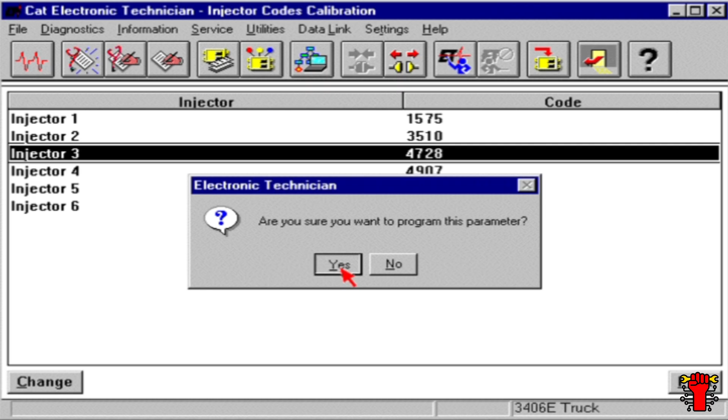Double-click on cylinder 3 and the Change Parameter Value screen appears. Enter the E-trim code for the new injector and click OK. A follow-up screen will ask for confirmation that the new code is correct. Click Yes and the new code is programmed into the ECM. This is all that is required to enter a new E-trim code for a replacement injector.

Under the Diagnostics, Diagnostic Test, Special Tests menu, there are up to 14 additional tests. These tests are used to actuate specific ECM outputs to determine if the ECM is working properly. A few examples of these tests include cooling fan on-off.

This turns the cooling fan ECM output on and off. PTO switch on lamp - this turns the PTO lamp on and off. Tachometer test - this sets the tachometer to 1500 RPM.

55 miles per hour speedometer test. This sets the speedometer to 55 miles per hour. The technician is instructed to connect one lead of a test lamp to the ECM output and the other lead to battery positive or ground.

The ECM output then powers the test lamp. Caution: a multimeter cannot be used in place of a test lamp. The ECM output must drive a load, such as a lamp. This completes our discussion of basic diagnostic tests.

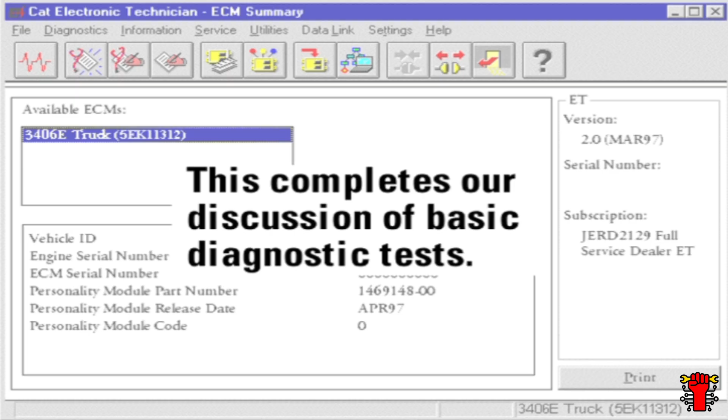A review of the most common customer complaints reveals the actual cause of the problem. Most injectors replaced under warranty are returned to the factory to determine the cause of failure. The process used to evaluate returned injectors is warranty analysis.

This process consists of 3 major steps. The first step is a complete visual inspection.

This inspection looks for signs of external damage caused by the following problems: burned solenoid terminals from loose connections, loose solenoid terminals from over-torquing, injector tip or nozzle case damage from engine overheat or improper assembly, rust or signs of water ingestion from the fuel supply, and damage from improper injector removal, parts handling, or return shipment.

The next step is a thorough injector performance analysis. This includes running the injector on a performance test bench at both idle and rated speed and fuel deliveries. This ensures that the injector actually operates correctly under all operating conditions.

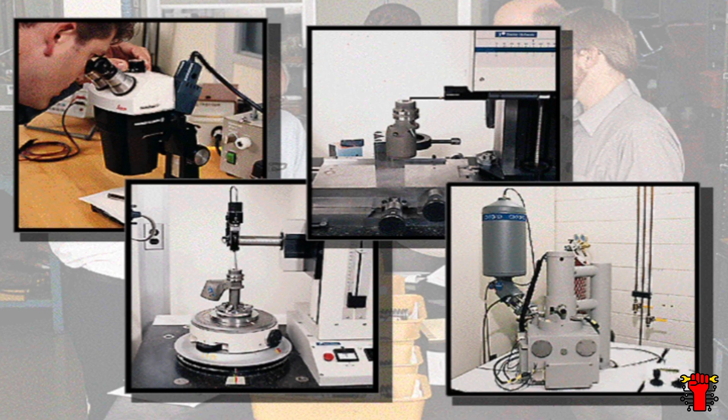The final step is a teardown analysis on any injector that does not pass all visual and performance test standards. Parts are inspected for defects using the most modern inspection equipment available, including microscopes, electronic roundness and surface finish machines, and even a scanning electron microscope where necessary. This equipment is capable of finding even microscopic flaws and defects.

In fact, the scanning electron microscope can magnify the surface of an object up to 20,000 times. It is used to identify inclusions that cause failures and locate the origin of cracks. Here, a sulfide inclusion in a piece of material is shown at various magnifications.

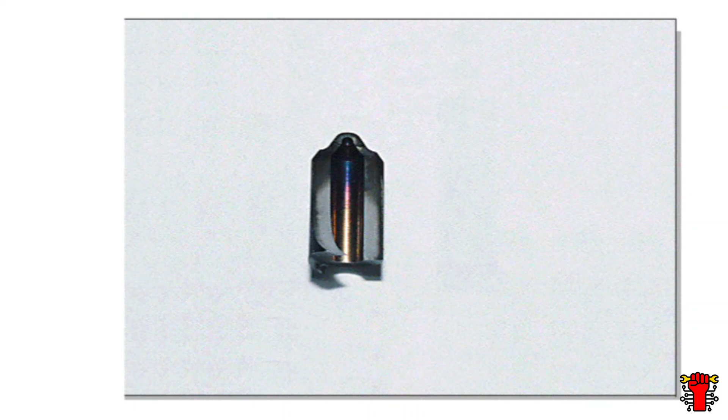In order to preserve evidence of a failure, it is very important that the failed pieces be returned exactly as they were found. If you are ever requested to return failed parts to the factory for analysis, do not clean the pieces or put them back together. Cleaning or reassembling the fracture surfaces destroys evidence which can pinpoint the failure. Wrap the pieces individually in soft paper towels and return them in the same box or envelope, clearly marked for identification.

Results from the performance, teardown, and failure analysis are compiled and reviewed by both engine and fuel system engineers to determine root cause of problems and necessary corrective action. Problem resolution teams address emerging problems where corrective action is unknown.

Let's look at some of the most common customer complaints listed on warranty claims and their actual root cause. The top 4 customer complaint categories comprise over 90% of all EUI injector warranty claims. They are misfire, low power, no information, and runs rough. Each of the above complaints is a description of the problem. Just a few root causes are responsible for most of the complaints.

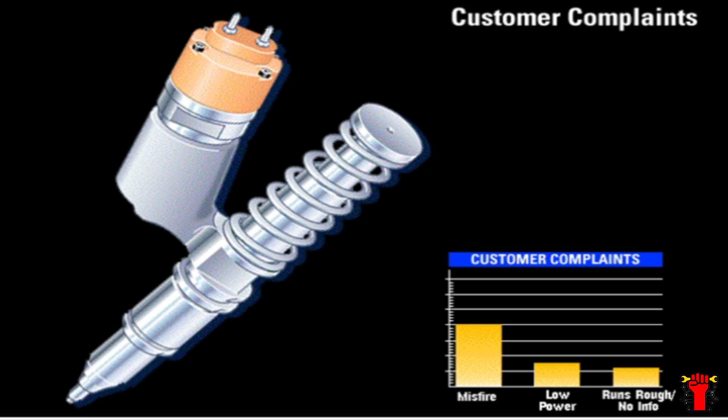Misfire is the single most common complaint. Several types of problems with internal injector components can cause misfire. These problems typically occur after extended use and usually result in a symptom of an intermittent injector misfire. Through warranty analysis, problem resolution teams identify and resolve these problems.

The second most common cause of misfire is no fault. This means that the injector had no visual defects and passed all factory performance tests. In short, the injector had no defects and did not require replacement. The automated multiple cylinder cutout test should help this problem because it positively identifies which injectors are acceptable. However, there are a few things the service technician should look for when diagnosing a misfire complaint.

A common cause of misfire is solenoid post erosion. Arcing from loose connections causes damage to electrical posts on the solenoid. Loose connections result from low torque on the nuts or over-torque, which distorts the threads. The symptom is an intermittent misfire that grows worse as the posts deteriorate. When troubleshooting a misfire, clean and re-torque the post connections before replacing the injector.

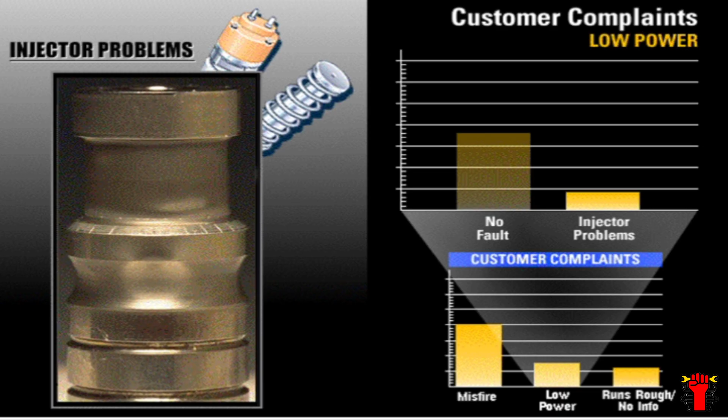The symptom of poppet erosion is actually a gradual loss of power. As poppet erosion gets worse, leakage of high-pressure fuel past the damaged poppet seat increases, resulting in a gradual power loss. The third and fourth most common causes of customer complaints are rough running and no information.

The rough running category is self-explanatory. However, the no information category is more confusing since the claim doesn't list a customer complaint. For purposes of simplicity, rough running combines these two categories.

Several types of problems can occur with internal injector components that may cause rough running. These problems result in increased leakage of high-pressure fuel past the damaged surfaces, which significantly reduces fuel delivery into the combustion chamber. The symptom of such problems is usually very low fuel delivery and one or more weak cylinders. This may also occur over an extended period as injector performance degrades.

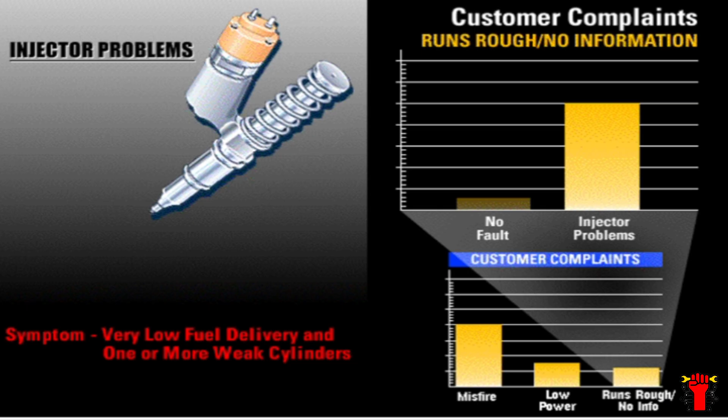A final problem that may cause rough running is failure of the O-rings on the stainless steel injector sleeve. This typically occurs only at extended miles. Deterioration of the sleeve O-ring seals is aggravated by several factors, including heavy load factors, high coolant temperatures, and less than adequate cooling system maintenance.

Engine coolant can attack and degrade the sleeve O-rings over time. Coolant can then leak past the O-rings and into the vacant cavity between the inside of the sleeve and the injector nozzle case. Coolant in this area is also exposed to the fuel O-ring on the injector, which seals fuel in the fuel supply passage in the cylinder head. This fuel O-ring is designed to seal fuel and has less tolerance to coolant than the sleeve O-rings. The fuel O-ring will eventually degrade and allow fuel to leak into the cooling system.

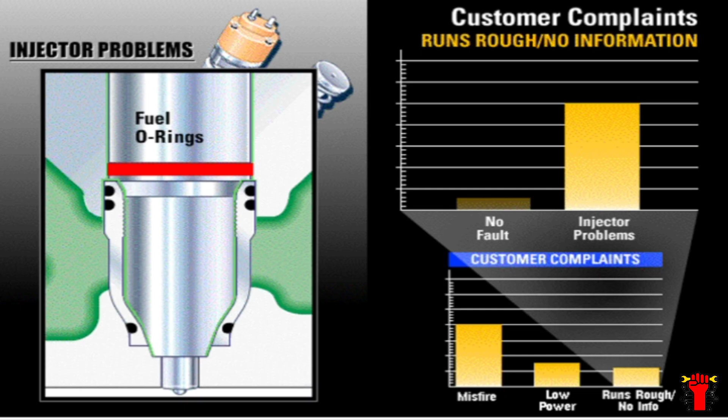Because fuel supply pressure is significantly higher than cooling system pressure, the leakage will only be fuel into the coolant for a period of time. This problem is usually detected through normal maintenance, but may result in cooling system overflow. If the problem is not detected for an extended period of time, the fuel O-ring will continue to degrade and allow coolant to leak into the fuel when the engine is shut down. Excessive coolant in the fuel will cause misfire and eventual injector seizure.

If an injector is removed and shows signs of exposure to coolant, remove the sleeve and inspect the sleeve O-rings. If the sleeve O-rings are found to be deteriorated from exposure to coolant, install new O-rings on all injector sleeves. If the sleeve O-ring leak was due to a cut, damaged, or improperly installed O-ring, install new O-rings only on that cylinder.

No-fault injectors are a minor contributor in the rough running complaint category. Again, the automated multiple cylinder cutout test should dramatically reduce misdiagnosis. All known injector failure modes combined account for about two-thirds of all returned injectors. This demonstrates a significant improvement in dealer diagnostics over the past several years, when no faults accounted for about two-thirds of all returns.

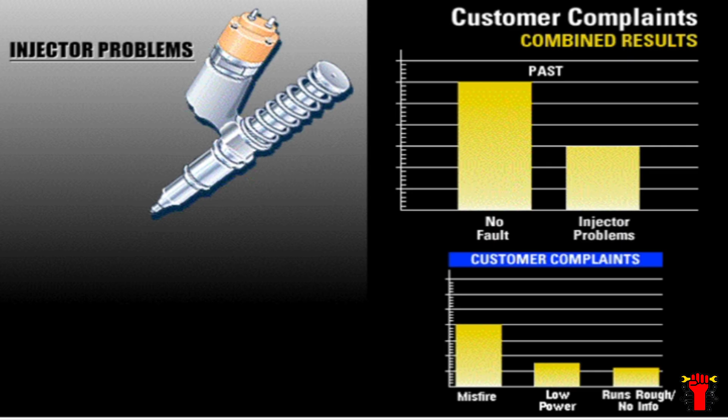Resolution teams are actively working to or have already resolved all injector failure modes. In addition to improved injector design, you'll see a rapid evolution in fuel filtration across the product line.

No faults account for about one-third of all injectors returned. This category represents our biggest opportunity to reduce warranty claims and improve customer satisfaction through improved diagnostics. This is the driving factor behind the automated multiple cylinder cutout test and the development of improved training methods such as this presentation.

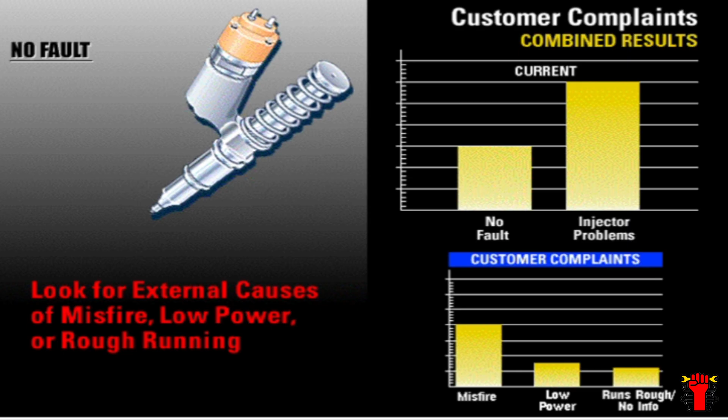You can help reduce no faults by looking for external causes of misfire, low power, or rough running. These include checking injector connections and wiring for clean, solid contact, checking inlet and exhaust systems for restriction, and checking fuel supply pressure to assure that pressure is adequate and the secondary fuel filter is not plugged.

Finally, make sure customer expectations are reasonable. Some customers have expectations for smoothness, economy, or performance which are simply beyond the capability of an engine or fuel system. In these cases, replacing injectors as defective is counterproductive because it reinforces the customer's impression that the parts were actually defective.

This concludes the introduction to fuel system operation and troubleshooting of EUI-powered engines. Understanding how the engine systems operate, how to perform basic diagnostic tests, and where to find service information will help you improve reliability and make it easier to troubleshoot and repair the EUI engines.